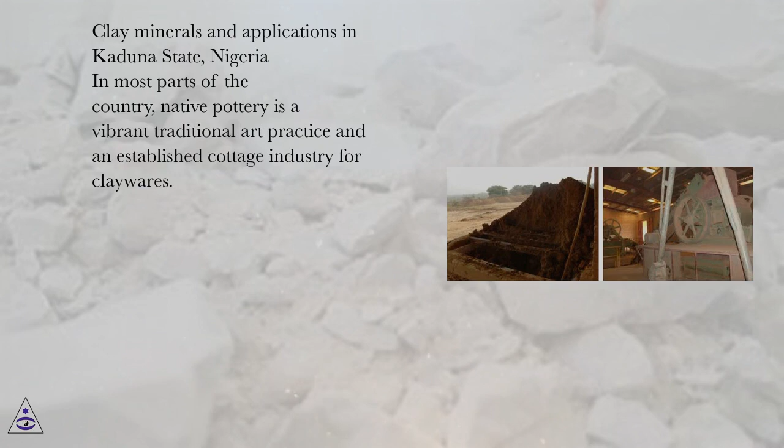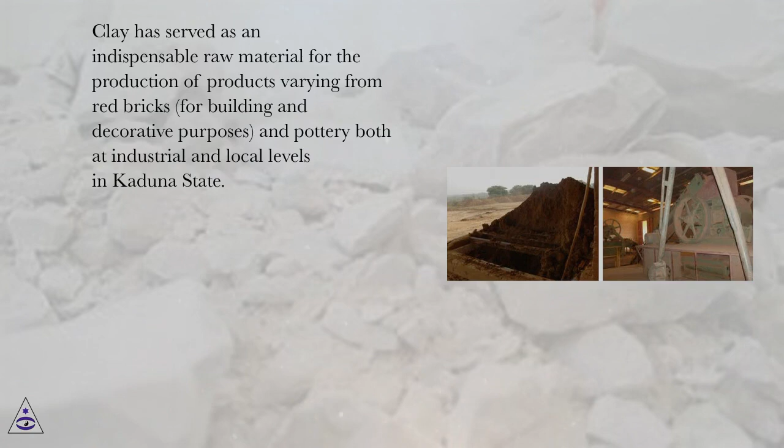In most parts of the country, native pottery is a vibrant traditional art practice and an established cottage industry for claywares. Clay has served as an indispensable raw material for the production of products varying from red bricks, for building and decorative purposes, and pottery both at industrial and local levels in Kaduna State. The location of existing brickworks, pottery works and other ceramic production is evidence of workable deposits within the state.

Specifically, the scope of this study surveyed the application of clay deposits as found in Mararaba-Rido, Jacaranda and Maraba outskirt areas of Kaduna State.

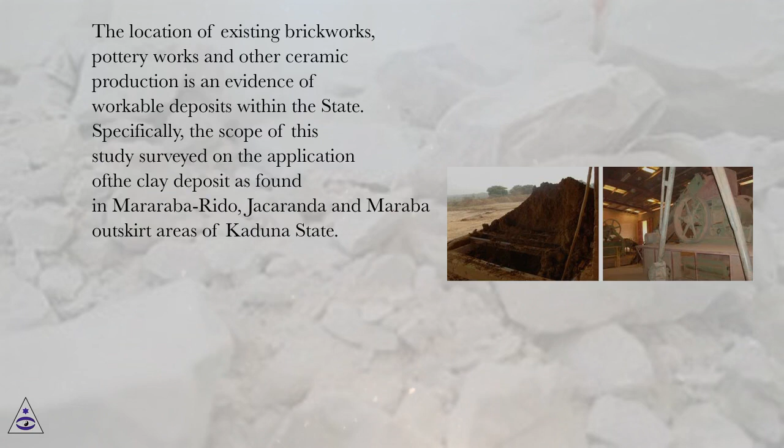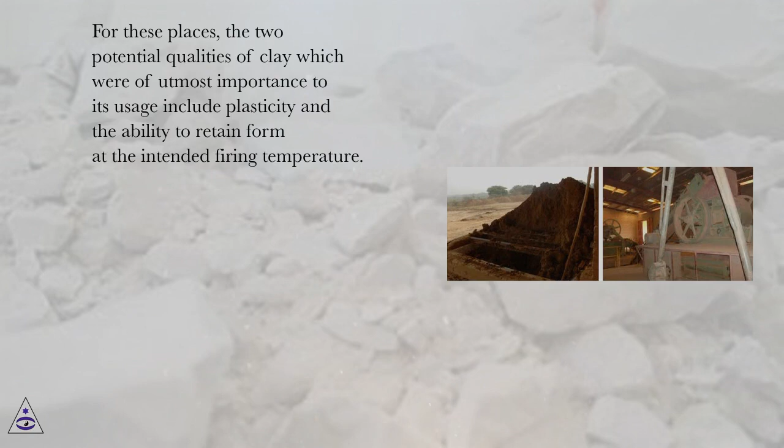For these places, the two potential qualities of clay which were of utmost importance to its usage include plasticity and the ability to retain form at the intended firing temperature. The generic property of the clay minerals indicates that of a naturally occurring earthenware/common clay which is suitable for the production of red bricks and potteries which are refractory enough for stoneware temperature.

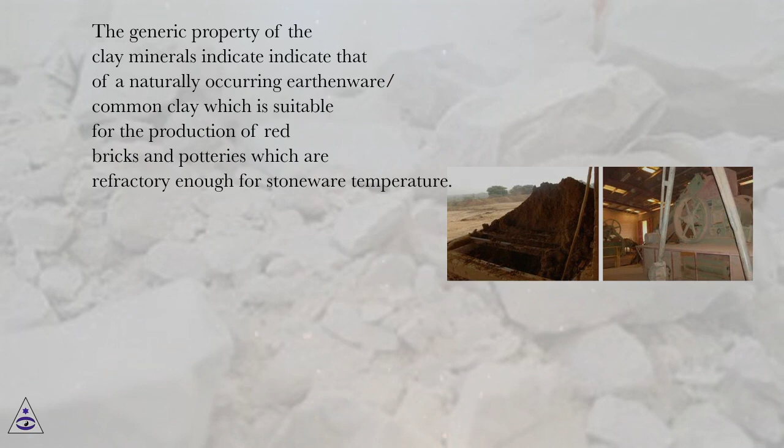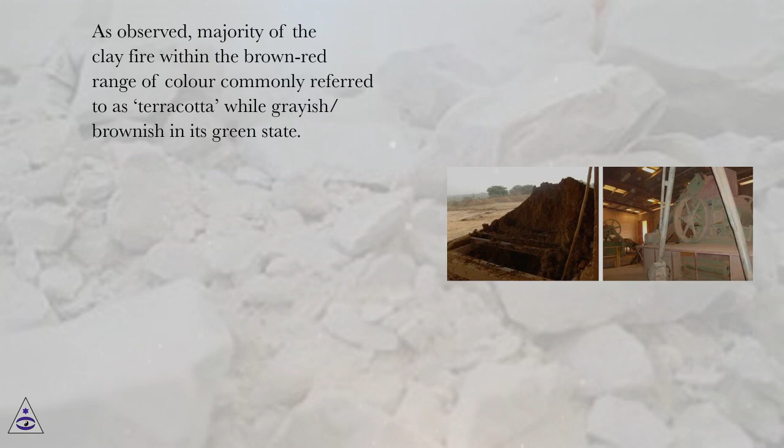As observed, the majority of the clay fires within the brown-red range of color commonly referred to as terracotta, while appearing grayish/brownish in its green state. As noted, earthenware clays are made up of a group of low-firing clays that mature at temperatures ranging from Cone 08 to Cone 02, 940°C to 1060°C.

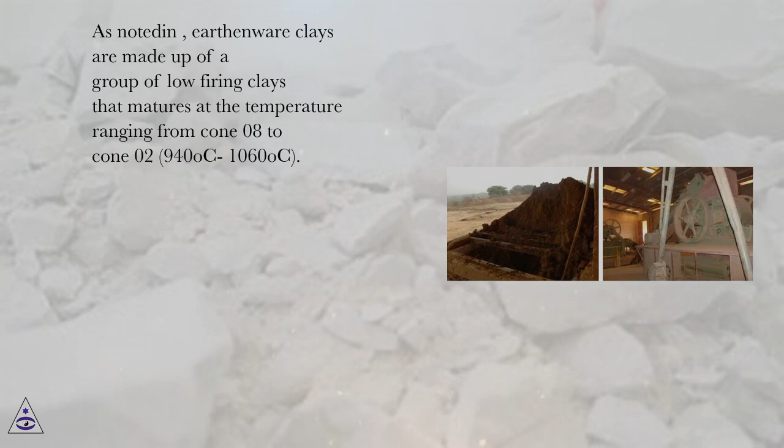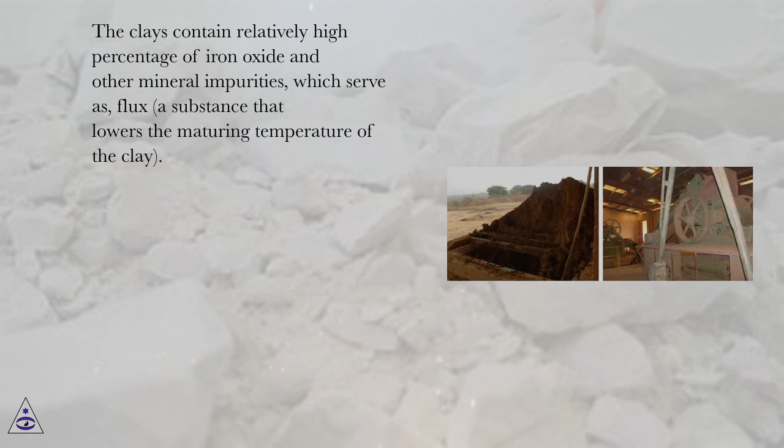The clays contain a relatively high percentage of iron oxide and other mineral impurities, which serve as flux, a substance that lowers the maturing temperature of the clay. Unlike stoneware clay which is almost completely vitreous, earthenware clay is known to be quite porous, with porosity between 5 and 15%. Usually, when the clay is subjected to temperatures above 1150°C, it deforms, bloats or blisters.

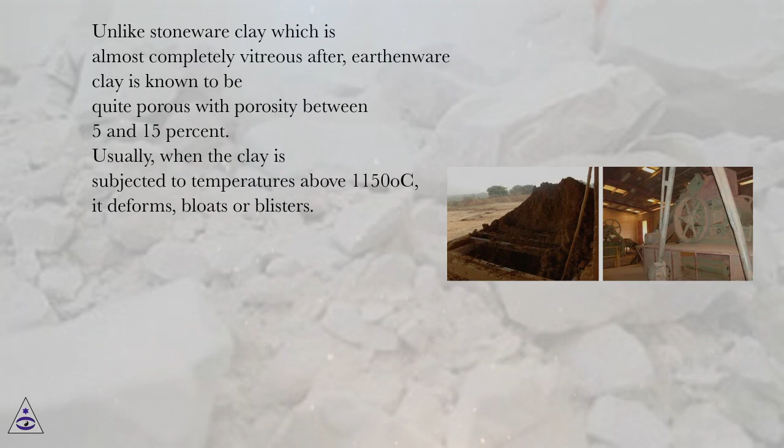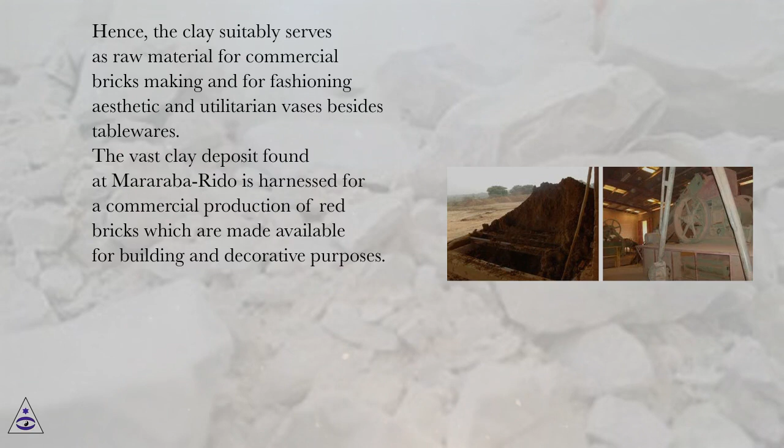Hence, the clay suitably serves as raw material for commercial brick making and for fashioning aesthetic and utilitarian vases besides tablewares. The vast clay deposit found at Mararaba-Rido is harnessed for commercial production of red bricks which are made available for building and decorative purposes.

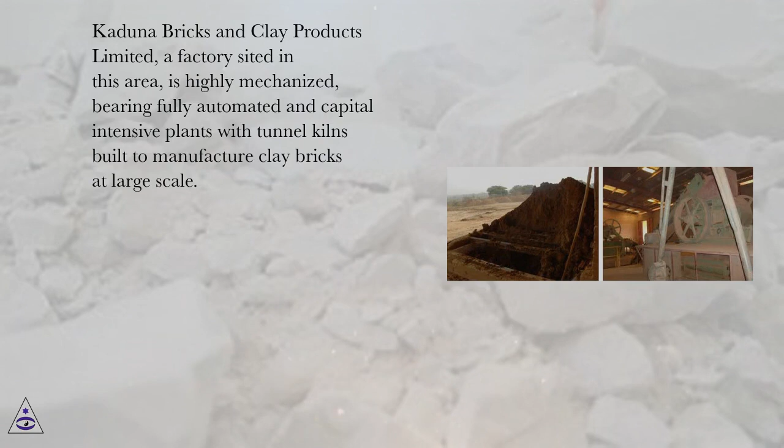Kaduna Bricks and Clay Products Limited, a factory sited in this area, is highly mechanized, bearing fully automated and capital-intensive plants with tunnel kilns built to manufacture clay bricks at large scale. According to reliable sources interviewed at the site, the factory is said to be capable of producing an average number of 70,000 medium-sized bricks per day.

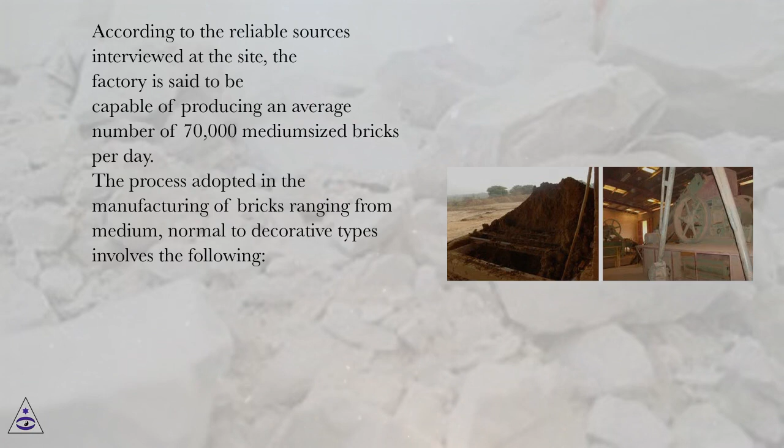The process adopted in the manufacturing of bricks, ranging from medium, normal to decorative types, involves the following: the production process for the clay brick industry, starting with clay winning, quarrying and transportation.

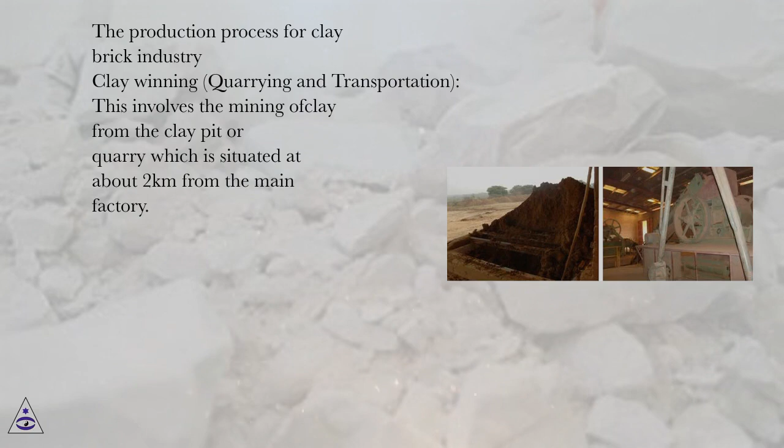This involves the mining of clay from the clay pit or quarry, which is situated at about 2 kilometers from the main factory. Because the clay material is usually required in bulk quantities, mechanical winning is usually carried out, i.e. clay is excavated, transported and dumped at the factory site with the use of a dragline excavator and large dumper truck.

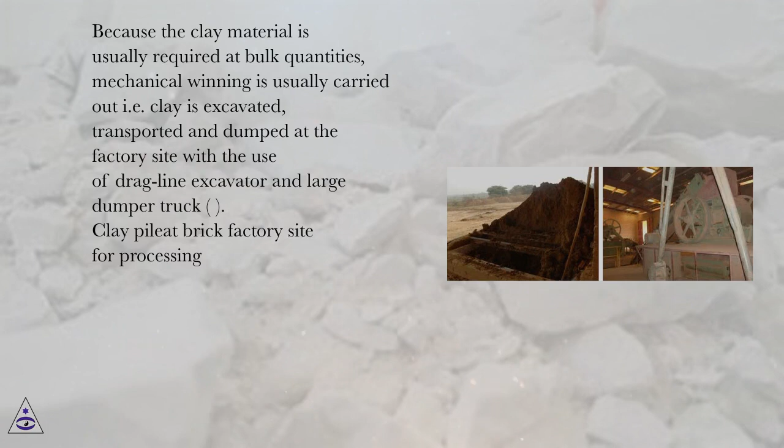Clay pile at brick factory site for processing. Clay processing and clay preparation: the processing phase is a stage where heaps of fairly wet clay are subjected to crushing, grinding and tempering before it can be suitable for shaping and molding.

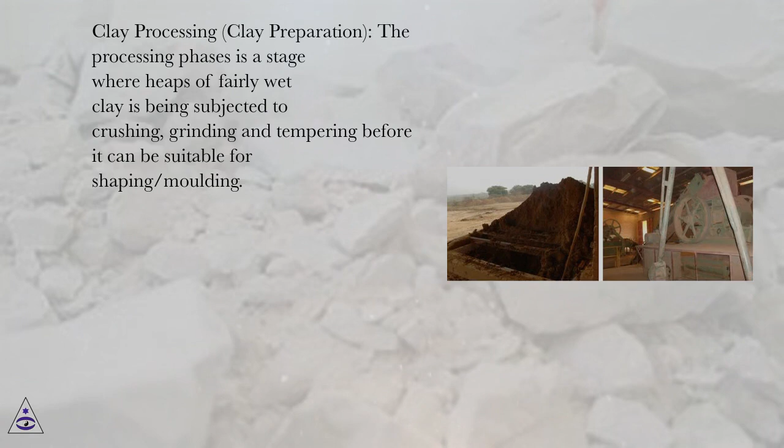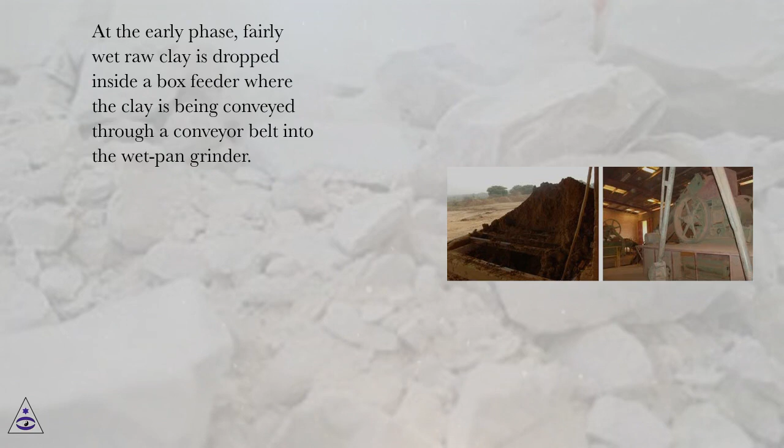At the early phase, fairly wet raw clay is dropped inside a box feeder where the clay is conveyed through a conveyor belt into the wet pan grinder. With the aid of two high-speed rollers inside the wet grinder, the clay is ground and mixed with water, then passed through a screen plate into the double shaft mixer for proper mixing, i.e. tempering.

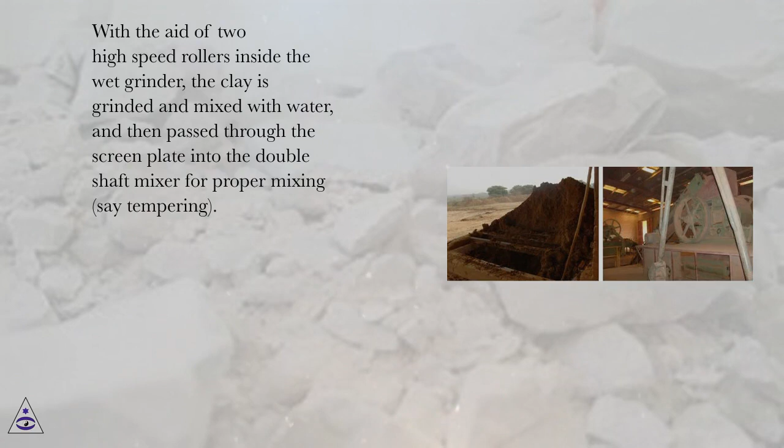Hence, the clay is conveyed into the vacuum double shaft mixer linked to the extruder where the molding and shaping take place. Clay processing plants.

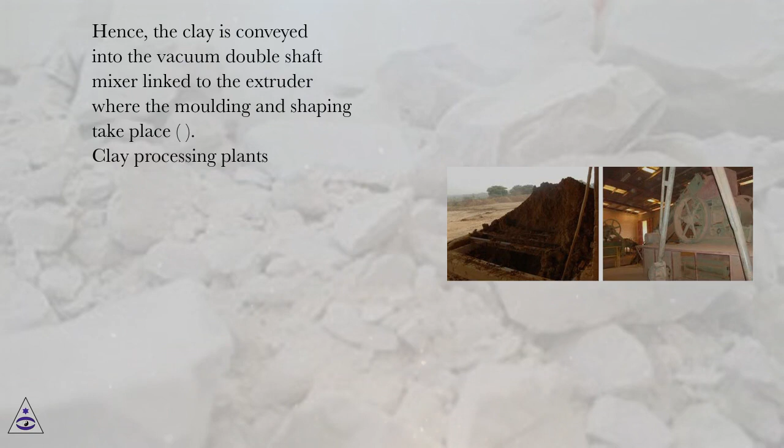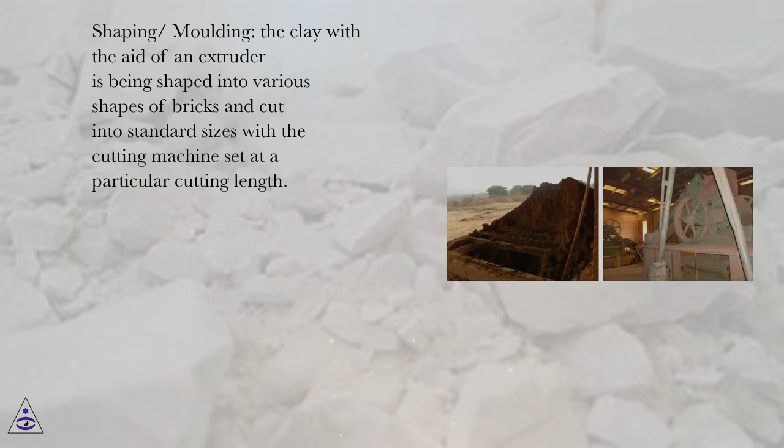Shaping and molding: the clay, with the aid of an extruder, is shaped into various forms of bricks and cut into standard sizes with a cutting machine set at a particular cutting length. The shape of the extruded bricks is determined by the die mold mounted at the extruder mouth.

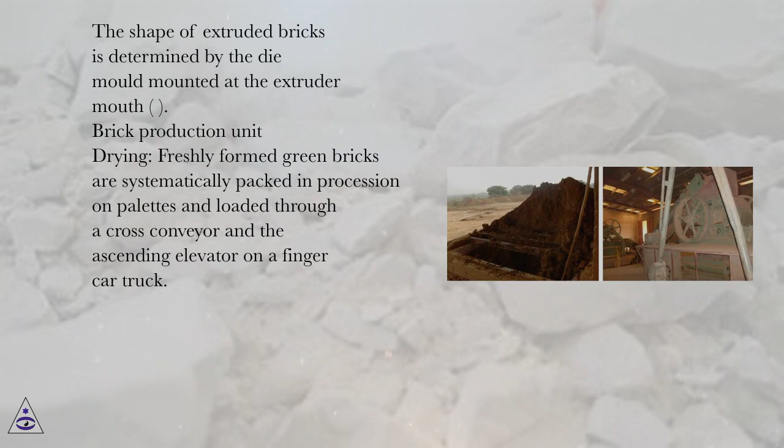Brick production unit: drying. Freshly formed green bricks are systematically packed in procession on pallets and loaded through a cross conveyor and the ascending elevator on a finger car truck. With the green bricks arranged on the finger car truck, they are transported to the dryer, where the bricks are exposed to hot and cold air for accelerated drying.

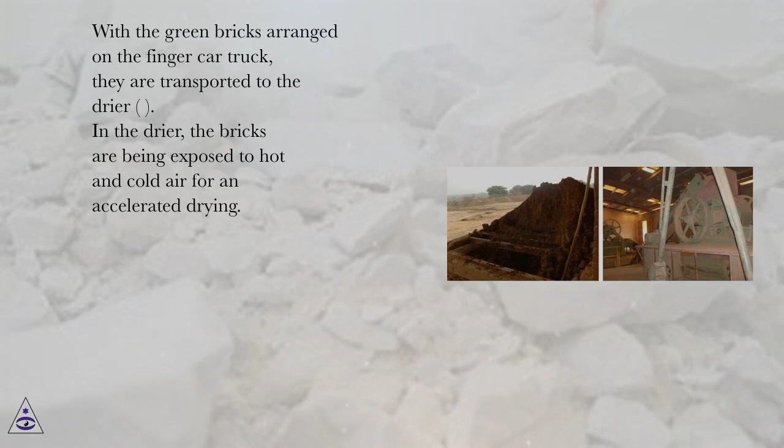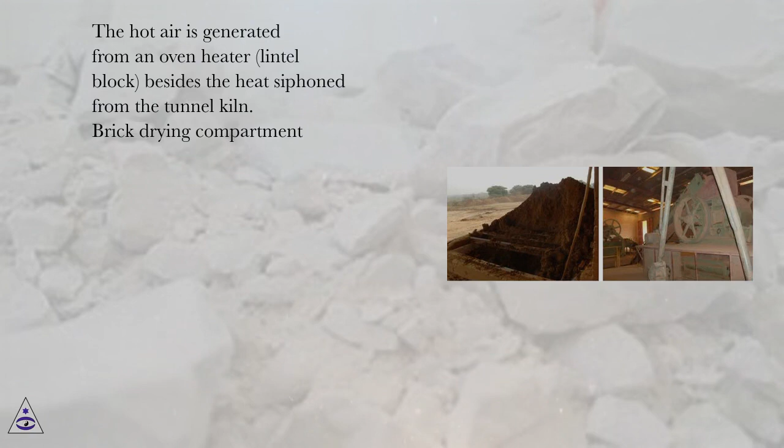The hot air is generated from an oven heater, lintel block, besides the heat siphoned from the tunnel kiln. Brick drying compartment. Firing: dried bricks are moved from the dryer with pallets on wheelbarrows to the firing chamber after unloading through a downward elevator connected to the cross conveyor stationed at the dry side.

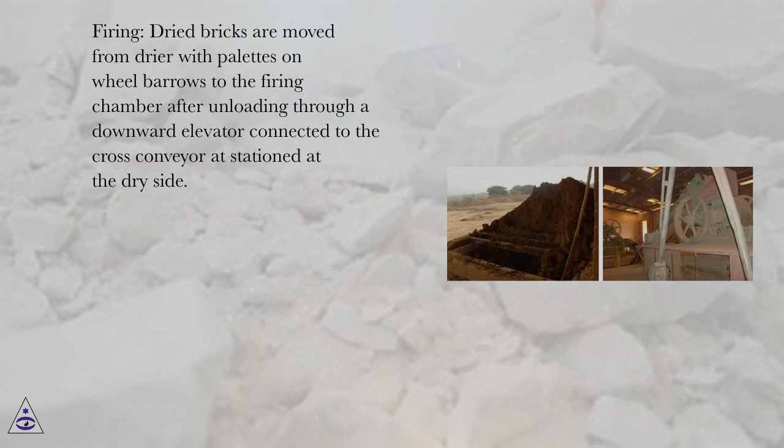Hence, dried bricks are intersparsely stacked in the firing chamber of the tunnel kiln and fired to a maturing temperature ranging from 950°C to 1050°C, with networks of complex oil burners and fans which help blow the oil for an accelerated combustion process, via an air hose fixed burner length.

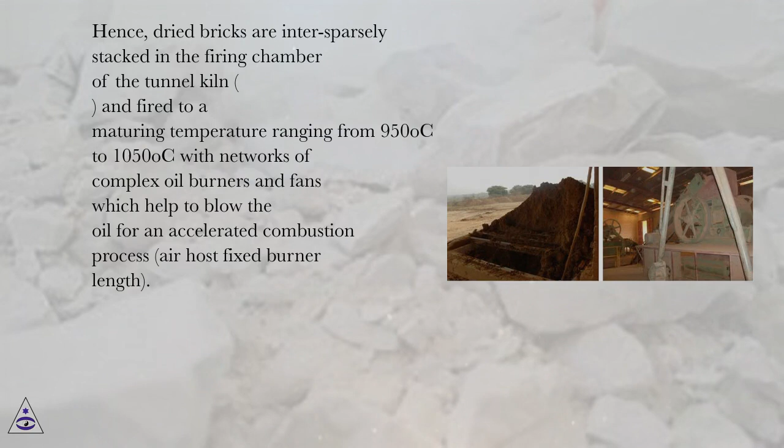Low Pour Fuel Oil, LPFO, also known as black oil, mainly serves as the heating fuel. Tunnel kiln and its inner chamber.

Dispatching: cooled fired bricks are gradually unloaded from the kiln and transported to a designated point around the factory where they are being collected directly by buyers.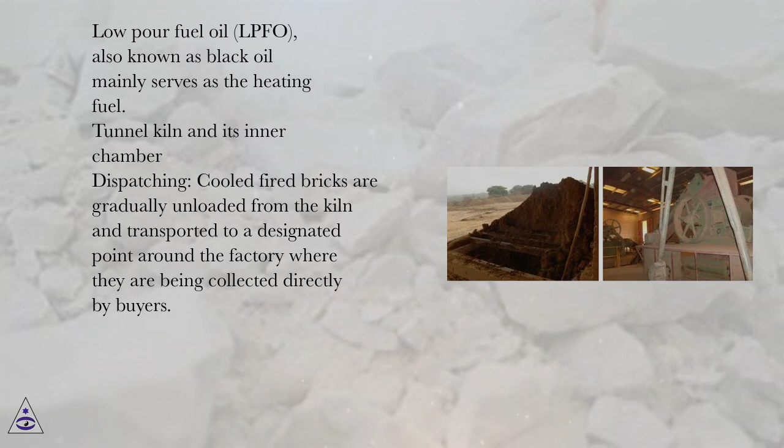Prices of bricks products range from 100 naira, 63 US cents, and 38 naira, 24 US cents. Commonly produced brick types include medium size, normal size, decorative types, and Ernestbrick.

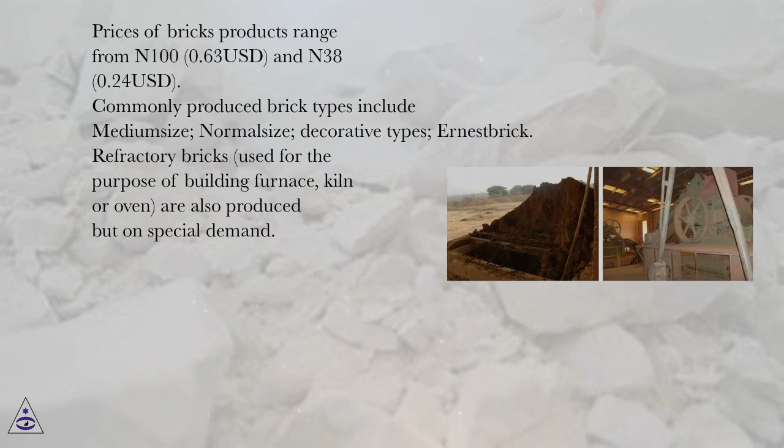Refractory bricks, used for building furnaces, kilns or ovens, are also produced but on special demand. In this case, a refractory is composed by blending clay with other refractory materials like kaolin from Bauchi State, Nigeria. As noted, Kaduna Bricks and Clay Products Limited is one of the main clay brick producing factories in Nigeria.

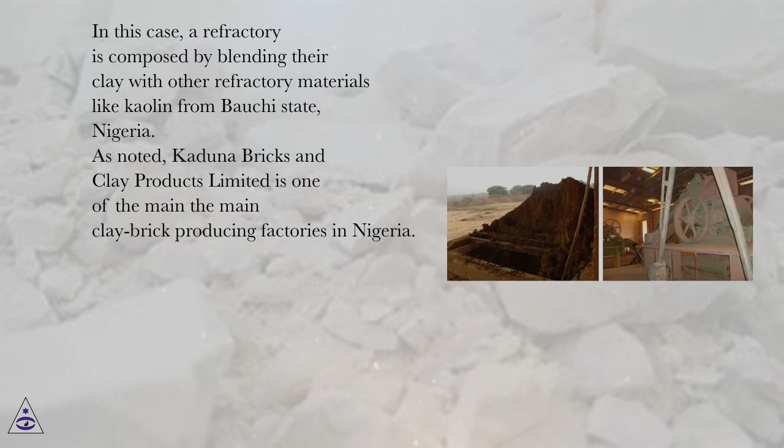Most of the brick-making factories that were originally established by the government are being privatized presently.

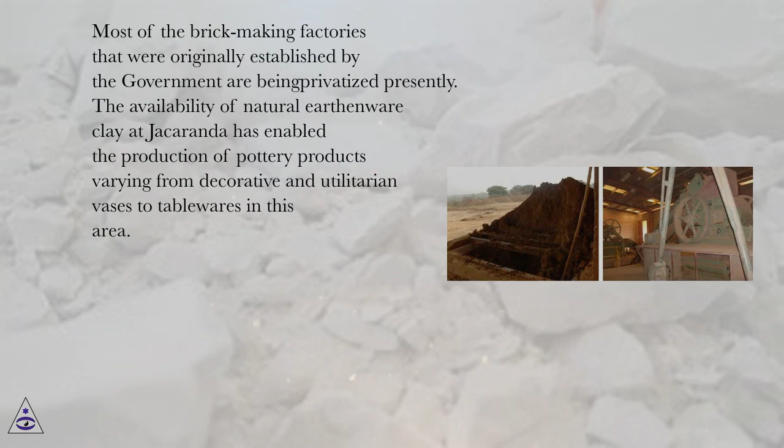The availability of natural earthenware clay at Jacaranda has enabled the production of pottery products varying from decorative and utilitarian vases to tablewares in this area. Situated some few kilometers away from Mararaba-Rido, the clay used in Jacaranda pottery exhibits similar properties in terms of plasticity, strength, and color, both at green and fired state.

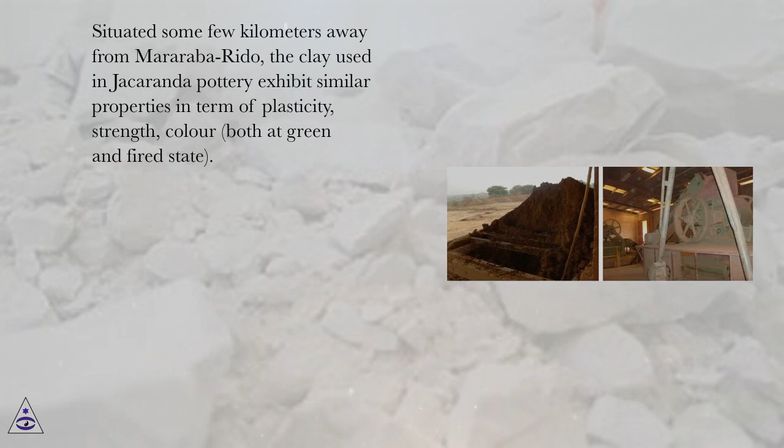The earthenware clay serves as the basic raw material for the production of pottery articles, while some other bodies are derived or composed by blending two or more clay types. For example, a stoneware body will be prepared when tablewares and other articles which require glazing are to be made.

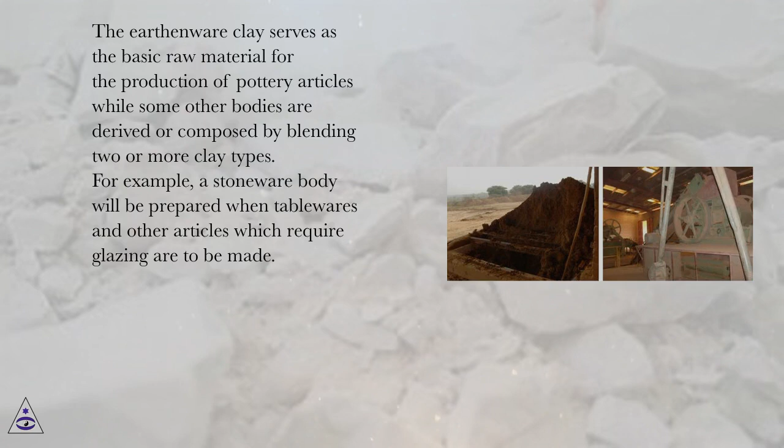Besides, the clay may be enhanced by adding other materials to get a vitrifiable and more workable clay with less shrinkage. However, as clearly observed, the Pottery Center is fully equipped with the basic studio tools and structures required for pottery production.

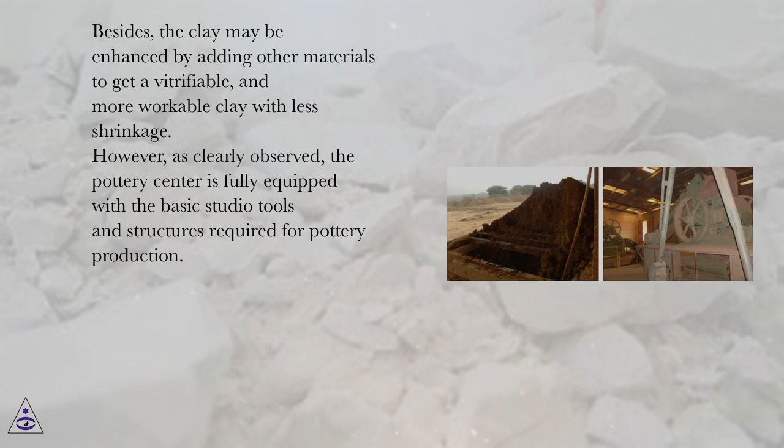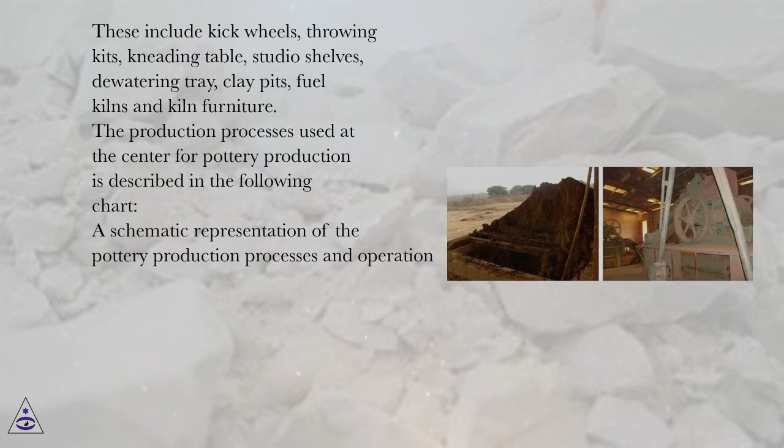From the information gathered, Jacaranda Pottery is a small-scale ceramic industry which has been in operation since 1982, when it was established by a Briton.

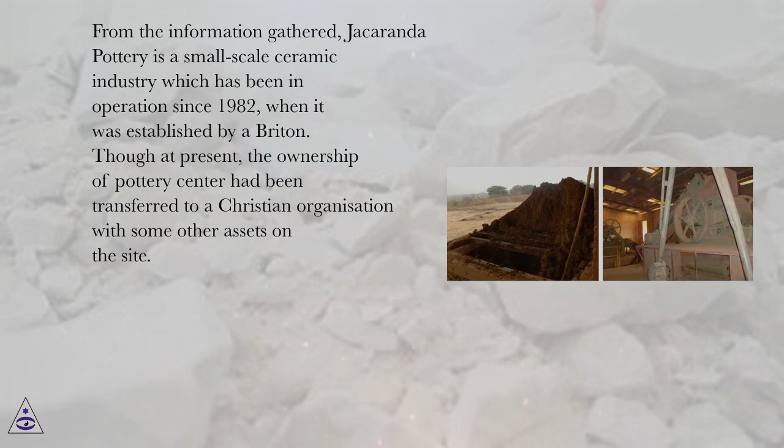Though at present, the ownership of Pottery Center had been transferred to a Christian organization with some other assets on the site. This was said to be brought about when the former owner, whose residence was in the heart of Kaduna City, got affected by the religious crisis that erupted in the state in 2001 and decided to return to his country.

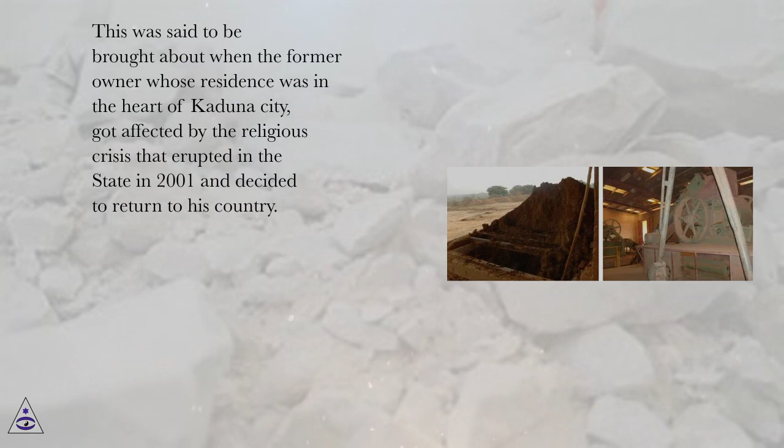However, the Pottery Center is still in operation, though production activities at the center have not resumed to its full capacity as obtained before. Products include creative ceramic and pottery forms, which serve as ornamental purposes, utilitarian vases and tablewares as shown.

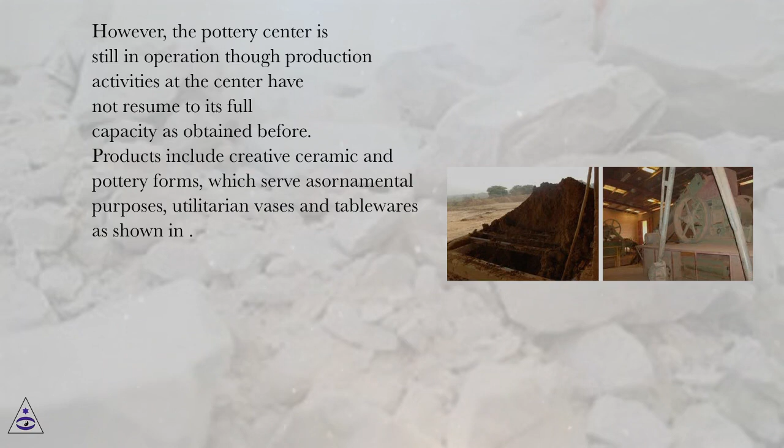The center was strategically located within the reach of basic raw materials, among which are clay minerals carefully collected from nearby sites, blended and manually processed to form stoneware body.

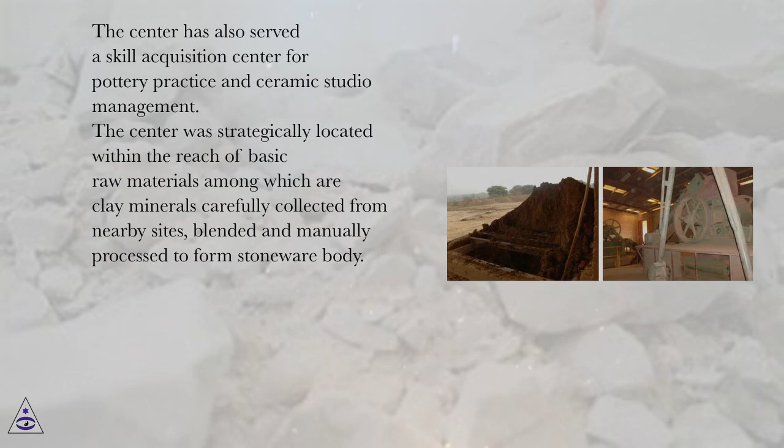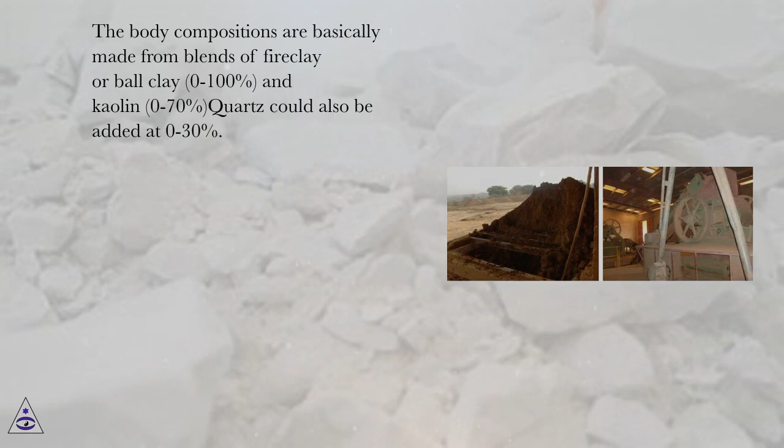The body compositions are basically made from blends of fireclay or ball clay, 0 to 100%, and kaolin, 0 to 70%. Quartz could also be added at 0 to 30%.

Stoneware is generally once fired with firing temperatures which can vary significantly, from 1100 degrees Celsius to 1300 degrees Celsius, depending on the flux content.

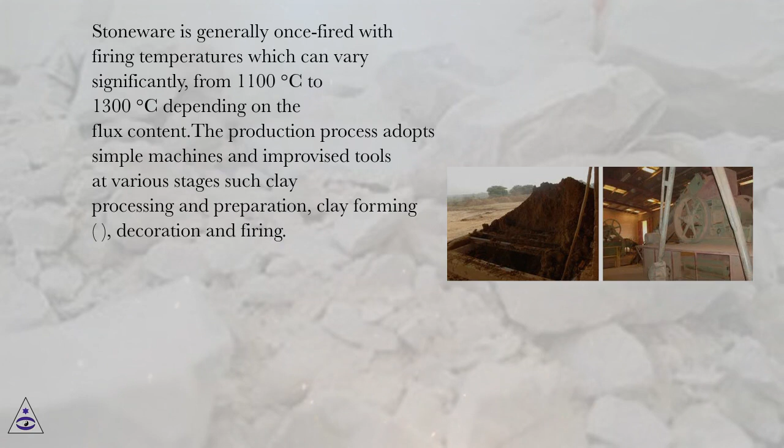The production process adopts simple machines and improvised tools at various stages such as clay processing and preparation, clay forming, decoration and firing. The pottery works from Maraba are culturally inspired with items ranging from tablewares, dinnerwares, decorative wares and souvenirs.

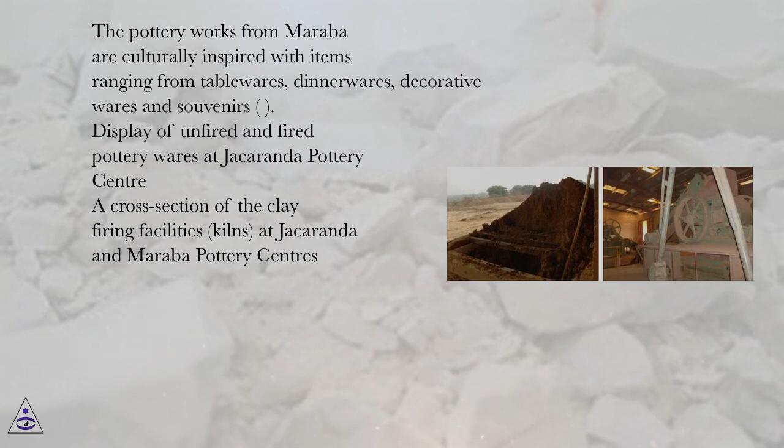Display of unfired and fired pottery wares at Jacaranda Pottery Center. A cross-section of the clay firing facilities, kilns, at Jacaranda and Maraba Pottery Centers.

Clay mineral deposition in an eroded mining site. Local clay body preparation and clay throwing process at Maraba Pottery Center. Unfired pottery and glazed ceramic wares on display at Maraba Pottery Center.